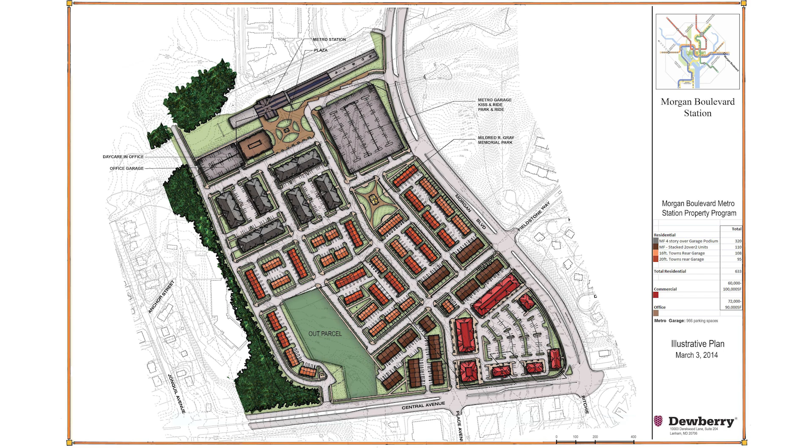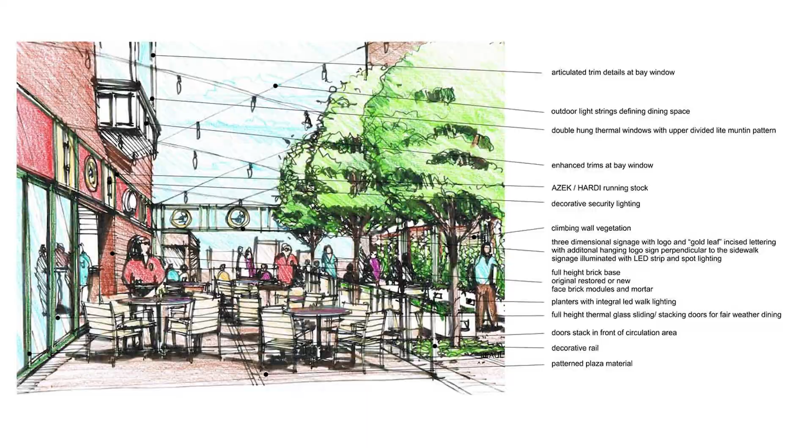To have a place that's memorable, it needs to have community parks. It needs to have places for gathering and socialization, but it also has to have places that can be private and secluded. It needs to take into account the land use. And land uses are such that you have any kind of density from low density all the way up to high density. So I pride myself in the fact that we can design a community that allows for any of those types of densities. We refer to it as a density because that's how many units or how much commercial or how much office can fit onto a space.

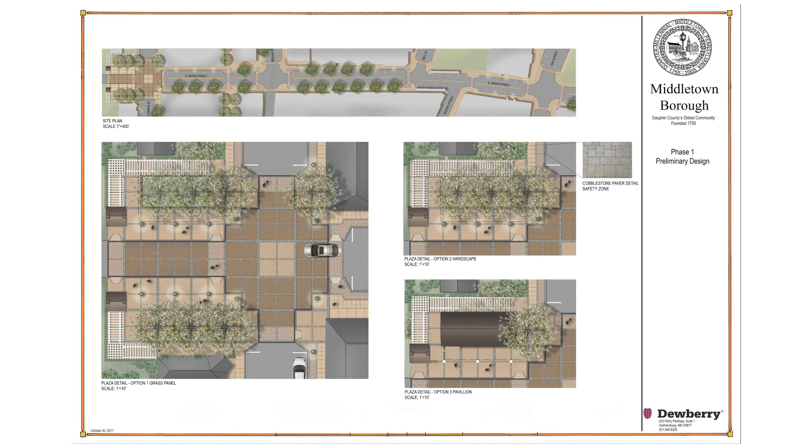The other concern we have when making a memorable place or space is that whole idea of the environmental impacts. The process we go through looks at the environment. It looks at saving tree areas. It looks at saving stream valleys, and it looks at buffering those so that you have those types of environmental impacts saved. We look at landscaping, landscape architecture, because that is part of the theming of the place. We need that community to have its own theme so it becomes more memorable.

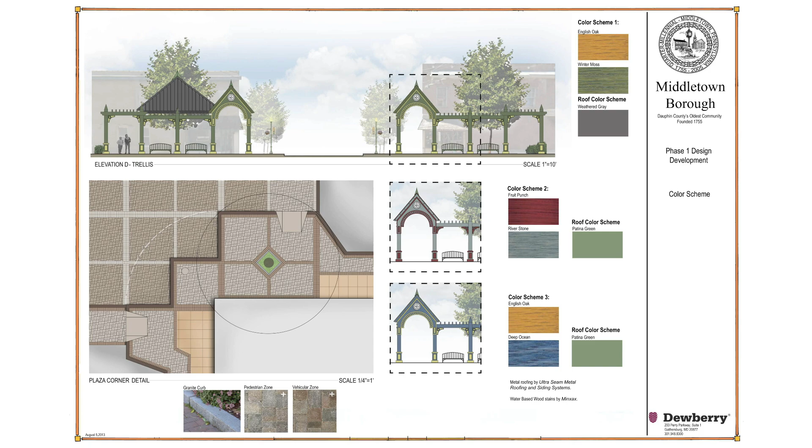Two other elements that are important in the design of a community is to create a diversity in architecture. Everybody's probably been into a subdivision that is stagnant because everything looks the same. What we really want to do is to make it so there's diversity. And so we can take the density that's being created, the different types of houses, and mix them together. I like the idea of creating a neighborhood. And each neighborhood becomes its own entity within a larger community. And in that neighborhood, we can put each type of house or unit.

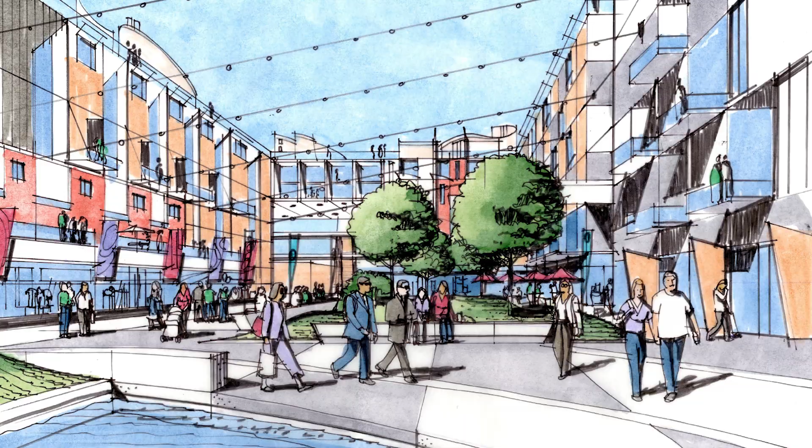Going from the center point or the neighborhood park in the middle, we can build out with heavier density, and that's usually like multifamily or single-family attached type units or townhouses. And then as we go out, we go to lesser density, which puts in larger townhouses, and then it goes to small single-family detached houses, and then to larger single-family detached houses. That also makes it possible so that we can create a streetscape that will relate to the house size. So the houses become farther apart, the streets become a little bit wider, the pedestrian ways become wider.

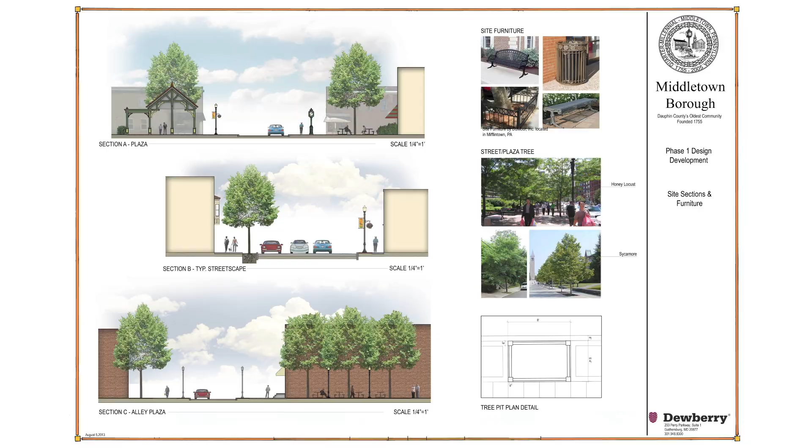Speaking of pedestrian ways, we really try and make it so that there is a network that allows for pedestrians. Streets need to allow for bikes. There needs to be both pedestrian and vehicular, but there also needs to be bike traffic and multimodal traffic. All of those things put together create an environment or a community that is, again, memorable. It's one that somebody wants to be there, they want to live there, and so it also makes it more desirable from a marketing point of view. It's also more desirable from a developer and a builder point of view.